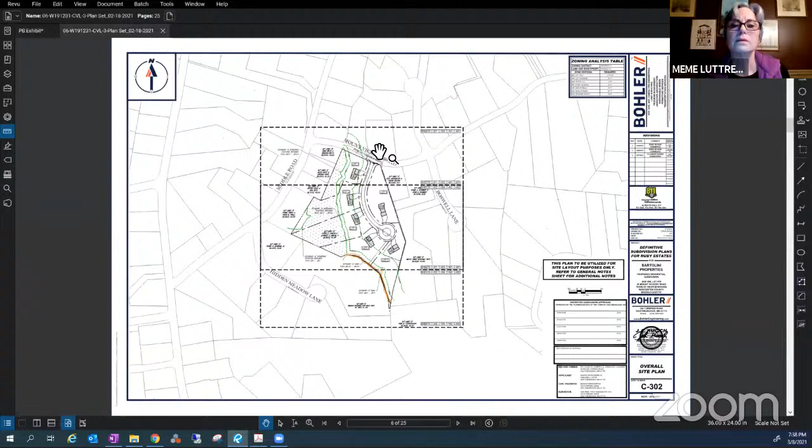I have a couple of questions. There's a 32-inch deciduous tree outside of the limit of clearing on lot 6, in the northeast corner, that's slated to be removed. Do you know why? Just trying to situate myself as to which one that is. Is that on lot 6? You said 32-inch diameter.

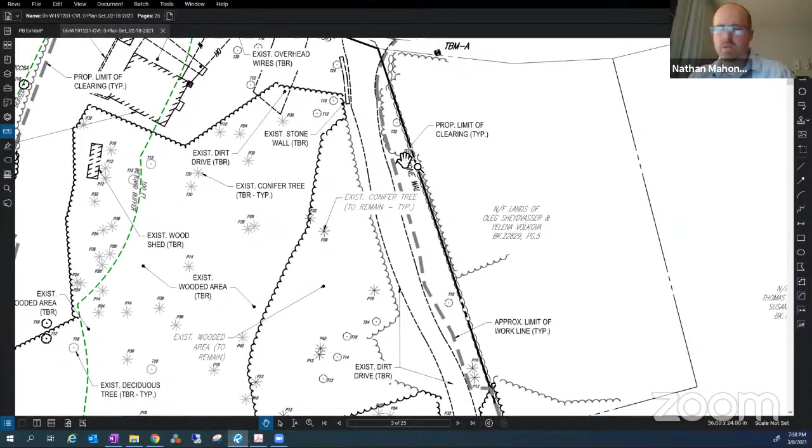Yeah, over by the stone wall. That may just be a typo on the plans. Everything adjacent to the stone wall in this area is proposed to remain, but I'll check to make sure there's nothing misdesignated along this stretch here.

So the way I read it, the darker marks were staying and the lighter ones were being removed. Is that right? No, it's actually reverse of that — my apologies that was unclear. The trees to remain are the lighter ones, and the ones to be removed are the darker color. So those along the stone wall are all light.

Yeah, I think they're just not showing up very well — I believe it's just a plot of the PDF. Everything within this stretch here, outside the limit of work, should be to remain. But I'll make sure that's clear on the plans, even if I have to label them individually as to remain.

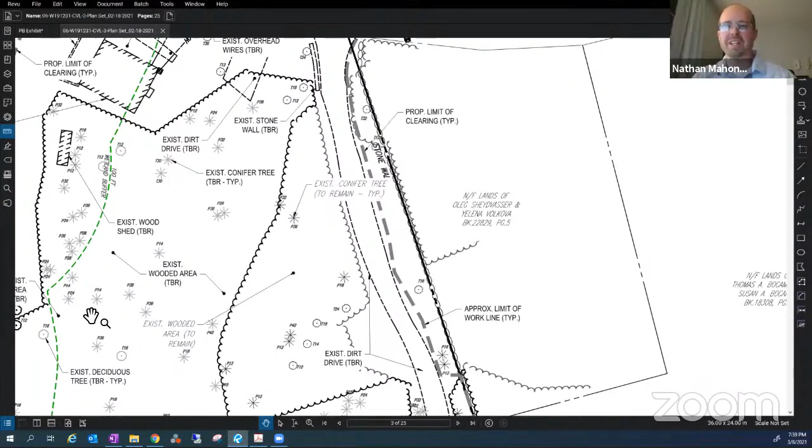And how will the trees that are slated to remain be protected during construction, within the limit of work? The initial thought is to put up an orange tree protection fence around those areas to denote that they are to be protected and to remain. Outside of that, the contractor will have to work with the developer to make sure those are designated and maintained in a healthy condition.

Okay. Nathan, did you provide us a PDF of this color plan? I did not, but I can provide one for your files. Okay, super, just email it to Sarah if you could. Absolutely, or me.

And where's the wildlife seed mix being planted? It is in this area over here, really in the back area, and then there is a portion up over here as well.

And how will those areas of the increased buffer be preserved going forward so they aren't mowed down? During construction, they're going to be marked off with erosion sediment control fencing and so forth to demarcate the limit of work for the contractor. The Conservation Commission has asked us to install markers along the 20-foot no-touch zone for the wetland to help identify the limits of those areas for the future homeowners.

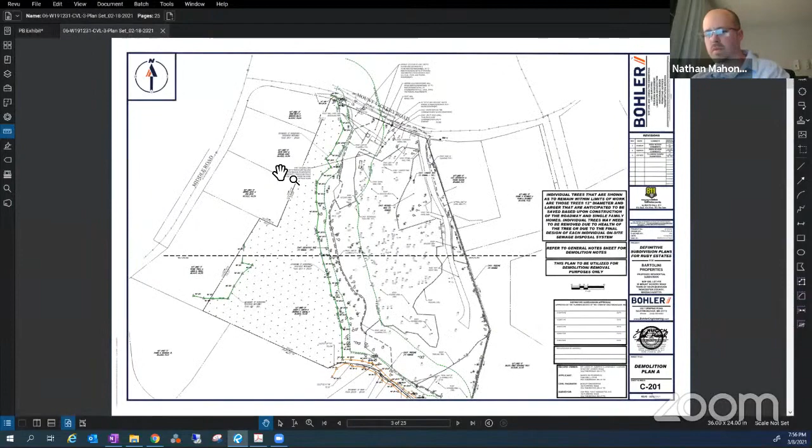Which leads me to sheet C-902 — if you can put that one up, Nathan. Or the one before it. Yeah, let's go to the one before that first.

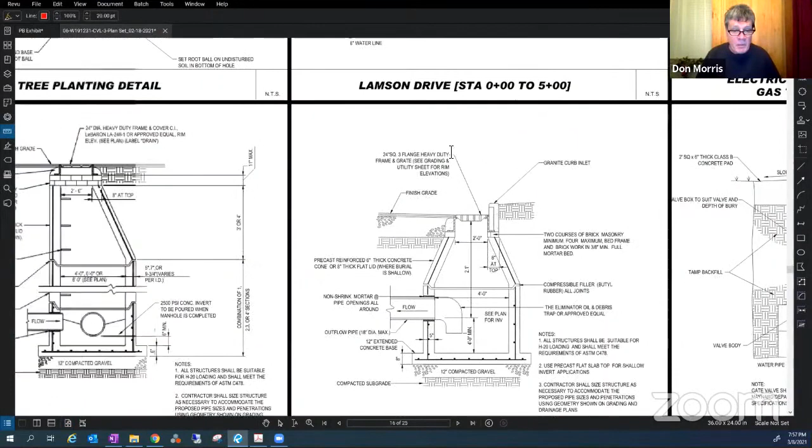And the granite curb is being proposed at the entranceway. Do we have any catch basins? Yes, we do. Any curbing at catch basins is supposed to be granite, if I'm right. Yeah, we do call for that on the catch basin there with the granite curb inlet.

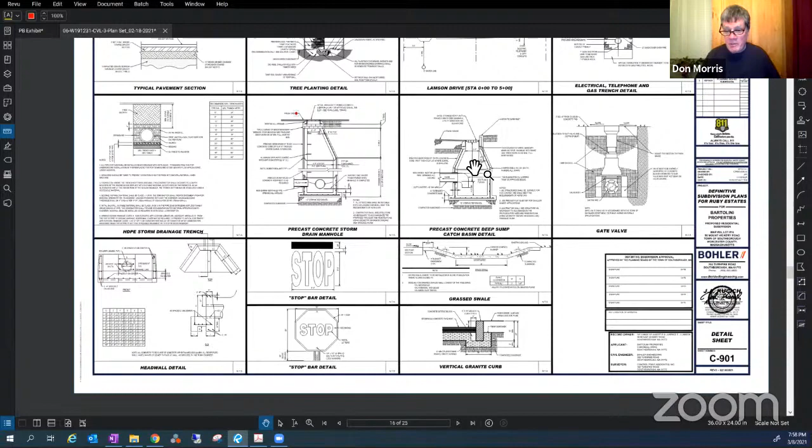So on either side of that piece of granite that backs up the inlet, it feathers down to some other type of curb, which would be the Cape Cod asphalt type berm. Is that right? Correct. So let's go to the next sheet, 902.

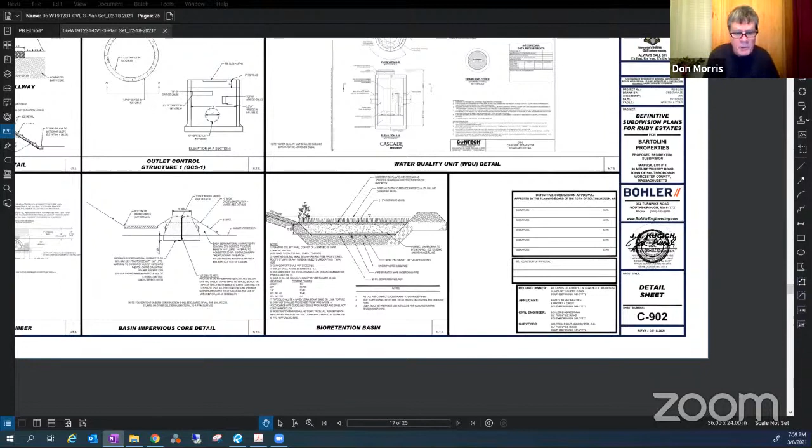Down on the bottom, we have the bioretention basin. It looks to me like that's a cut and paste showing a typical bioretention basin and how it's intended to function, which is fine. But on either side, it shows a different type of materials or conditions, and I don't think any of them apply to where we're putting the bioretention basin.

So if we go back to the first page you had tonight, the one with the colors - what I'm asking, for clarity and for the record, would be to pick a station along the road, let's say between house 1 and 2, and do a cross section of the roadway. On the west side it would show grass, then a Cape Cod berm, 20 feet of pavement, and then grass sloping down to that swale.

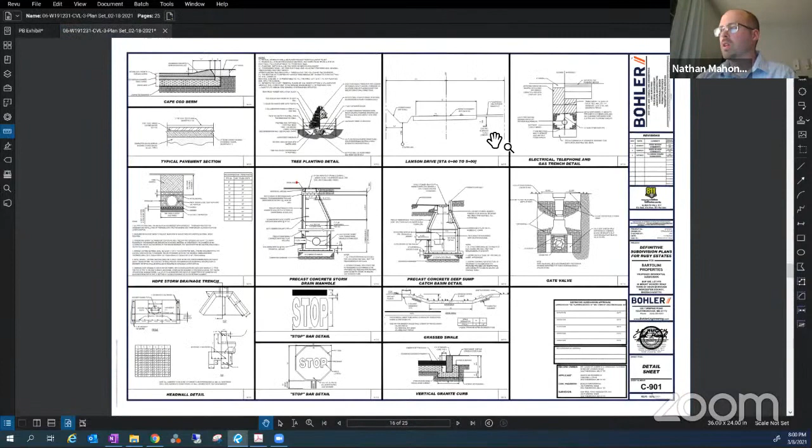Is that right, Nathan? So the plans do show a typical cross-sectional detail for stations as you come in off the entrance down to where you get to the curb, showing the cross pitch, with the road pitched to one side. So curbing isn't required on the upper end, and on the lower end where we had curbing, we're now requesting a waiver for the grass swale. If something similar would help in addition to that typical detail for the bioretention through the cul-de-sac area, we could do one there as well.

Yeah, I guess I missed that one on 901 at station 0 plus 00 to 5 plus 00. Do you know if the DPW director has seen that? Or do you have a green light from her to do this?

It's my understanding the plans as submitted are distributed to department heads for review and comment. We haven't received any comments from the DPW to my knowledge. All right, well, I think what we'll do in the time we have is chase that down and make sure we have a clear green light from DPW that this arrangement for that 500 feet of roadway is okay.

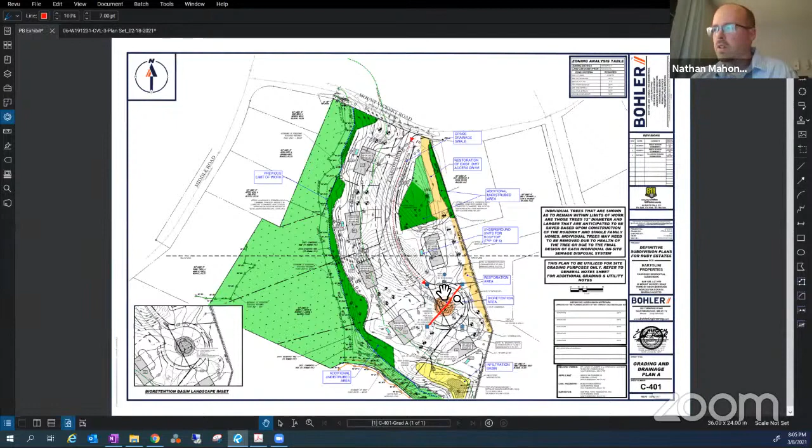I think we need to have a good detail of that, because I can just say which way the water would go, and then if there's any kind of a lip, a mound of sand, ice or snow, it's going to stay on the pavement and work its way around the bioretention area. I guess depending on the steepness of the grade, that would vary. So I'd like you to take a look at that and give us that cross section if you could.

We could certainly add that. And sooner than later, because I'd like to really have a comfort level for the planning board that the DEP, the DPW is okay with it. And if it's really a good idea, then maybe we would incorporate it. The DPW and the town would use a similar type design.

So, the waivers, no, also on this sheet, those little blue recharge structures, are those new, were those on the plan the last time? No, those are new with this submission that was recent. Oh okay, I suppose there's a detail for that.

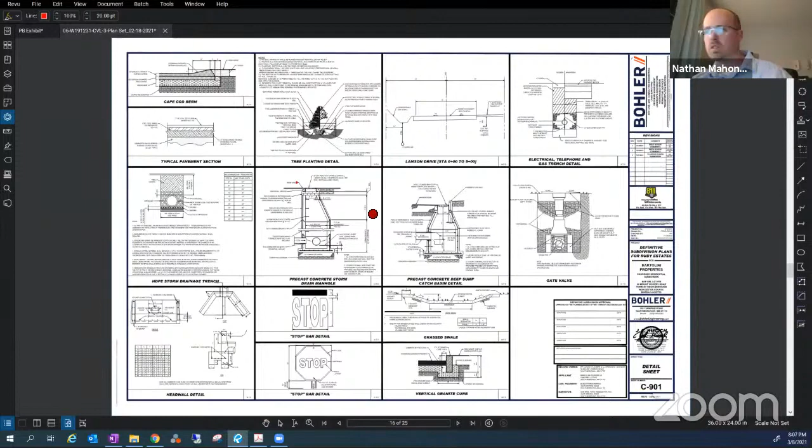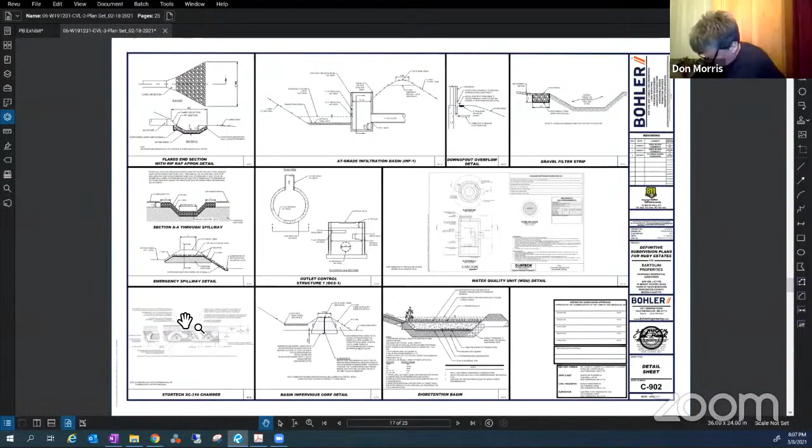There is, it's a typical detail for the StormTech SC310 chambers. Is that on 902? Yep, that's on the bottom corner of 902. Oh yeah, oh you have the Caltex in there? The StormTechs, yes, it's the plastic arch chambers. Yep, okay.

I can't read it, does it say the capacity and the size? So it has the information for the units on there. The grading and drainage plan calls out the particular number of units to be installed in each location.

And I believe, maybe I misunderstood, but did you say a few minutes ago that you've reduced the footprint of the houses? Yeah, I believe Mike chimed in and said that the footprints were smaller with the new footprints we have on here. Do you know what the percentage reduction is? That number, I don't have it off the top of my head, no. It's less than 50%. Yeah, it's not a 50% reduction in the footprint size, no. Would we say 20%, 10%? I'd have to overlay them to get you a closer number.

Well, it must be not a tiny number, like 1 or 2 square feet, because some of the more eagle-eyed planning board members observed an apparent difference. So I think that's the kind of thing, in addition to the other things that you did, that we were looking for at our last meeting as far as taking the LID seriously. And it seems like you've made major steps in that direction. So much so, I guess, that the conservation has given you the green light. And you're not hearing a whole lot of critical comments from the board tonight.

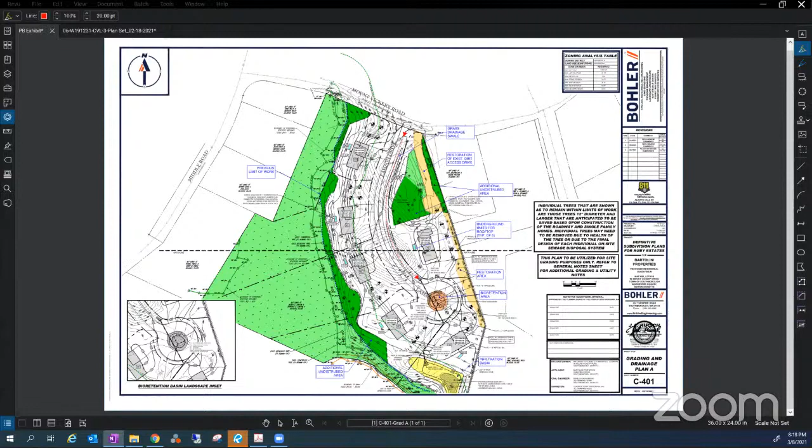Okay, thanks. Anyone else from the public? I do not see any other hands raised. Okay, while we're going over this next piece, if someone does tune in from the public, you'll let us know, Sarah.

So the current approval period for the definitive subdivision is March 20th, and for the LID is April 12th. Now, the proponent has submitted a request for continuation and extension of a public hearing, to continue the public hearing to March 29th, and that the approval period on the matters, which I take to mean the LID and the definitive subdivision, shall be extended to April 16th.

So before we can continue the public hearing, we need to extend the approval period. And that motion would be to extend the approval period for both the LID and the definitive subdivision to April 16th, 2021.

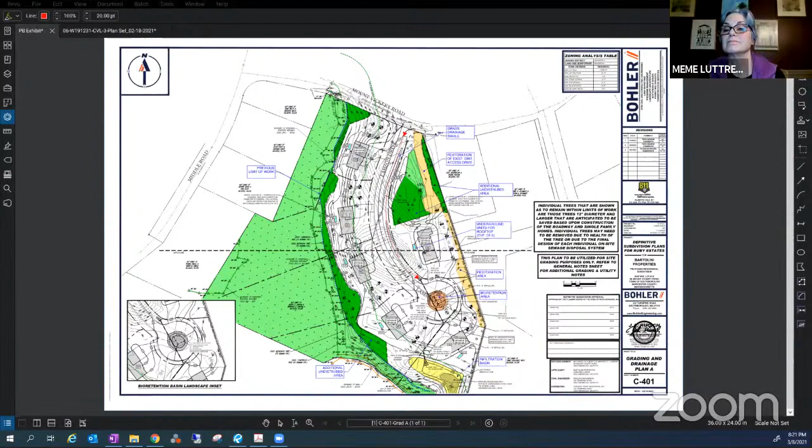Meme, you cut out. Could you do it one more time? Luttrell, yes. Thank you. So, Michael, I will, and Nathaniel, I will...

Sign this and get it to the, this is your request. I will sign this and get this to the town planner. You gonna be in tomorrow, Karina? Yes, I'll be there. We'll try to get it to the town planner and then the town clerk tomorrow.

And thank you for requesting that extension. So we all have a little bit of homework to do. Not much compared to what we talked about the last time. So seems like we're really making very good progress. Any more questions or comments before we entertain a motion to continue the hearing?

Oh, we already did. I have a couple quick questions. One question for you, Mr. Chairman. Isn't it precedent of the board to ask for sidewalks someplace else when a waiver is requested? We've done that. And again, maybe that would be part of our research to see, if it's a 2-house subdivision, I'm not sure how often we would ask a developer to put in 100 feet of sidewalk someplace else. But if it's a 20, 30 house subdivision and it's waived and there's a need for it somewhere else, we have negotiated that. So I guess we'll take a look and see what we have for a need for sidewalk and the developer's ability to grant any request we may have to build a sidewalk somewhere else.

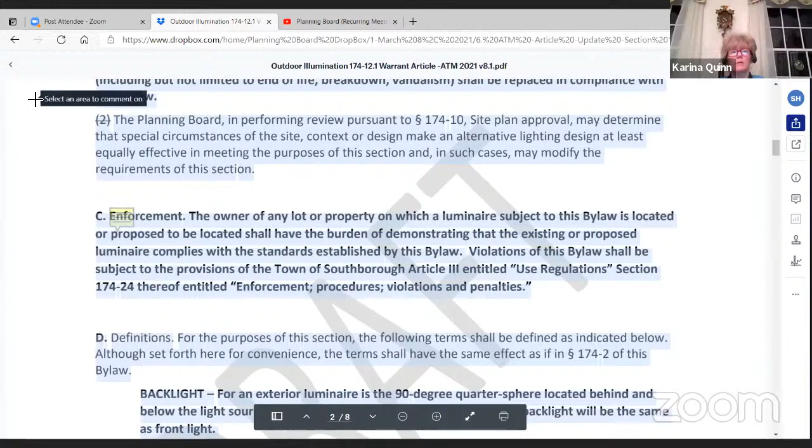I don't know why everything's highlighted. The enforcement piece, I'm sorry, I don't know why everything is highlighted here. Try clicking somewhere on the screen. Nothing, huh? No. Just one second, I'm just gonna... Gotta love technology, right? I'm just gonna try to close it and open it back up again. All right, better. Okay.

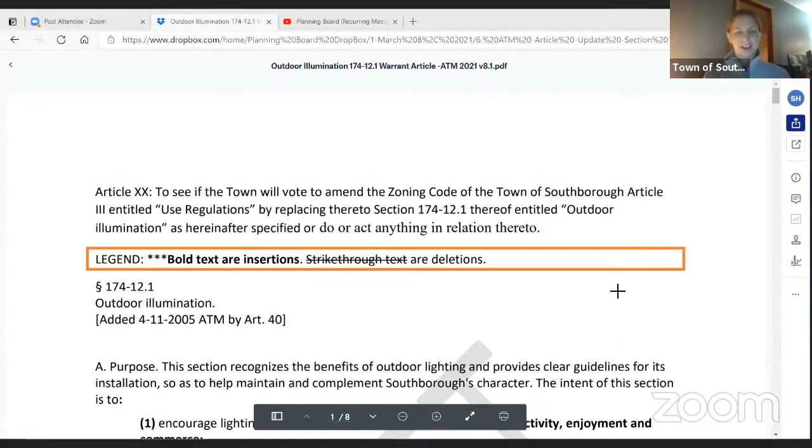So really, the enforcement section is where I think the working group is going to be likely focused in terms of revisions this time around, to make sure that interdepartmentally everyone has an understanding of what the process is. There were some details written into the original bylaw revision, many moons ago,

that really specifically laid out the process for enforcement. Town Counsel and the Board of Selectmen both weighed in and recommended dialing that back to a reference to the enforcement section currently in the town code, and then to move any kind of administrative processes over into the rules and regulations. So at this point, that's kind of what we're working on: the enforcement section would go into the bylaw, and the administrative details would be worked out in the rules and regulations over the next few weeks.

Marnie, I don't know if you have anything to add. Yeah, I think at a high level there is a discrepancy in interpretation of enforcement. We needed to be very crystal clear that the illumination bylaw is for the town of Southborough, articulating upfront that it's not just for industrial or commercial properties—it actually applies to residential as all of our town code does, but apparently we had to be very clear about that in this bylaw update. By doing that, we also wanted to provide clarity for enforcement: that the owner of a property that is subject of a complaint would be the person responsible for actually proving that their luminaire doesn't trespass and impose any challenges to the bylaw.

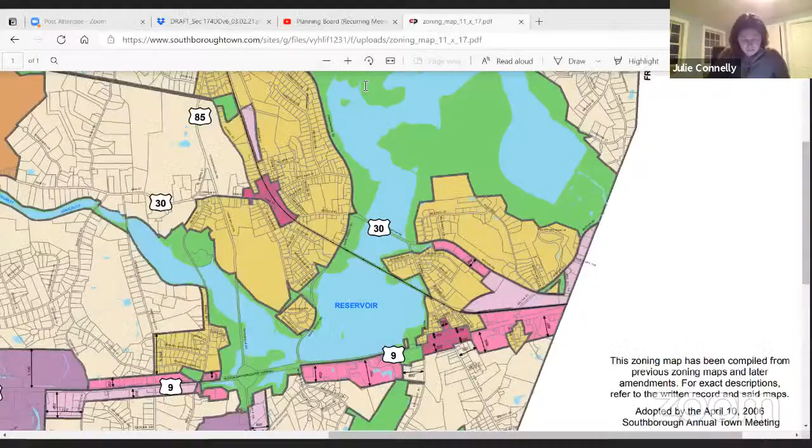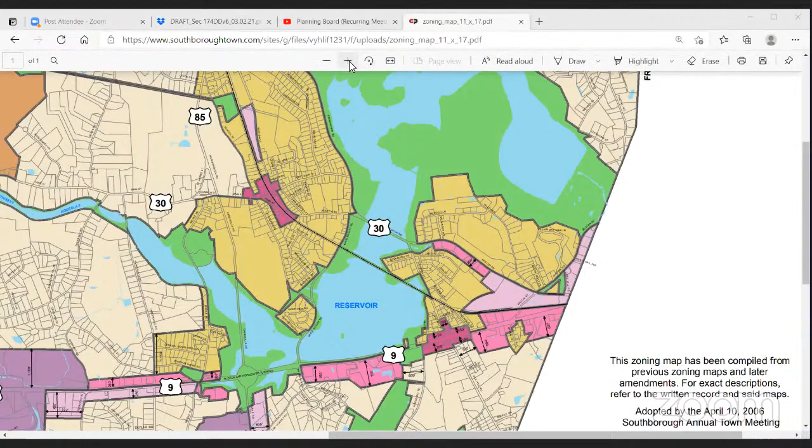Yes, thank you. I'm very appreciative of some of the comments of planning board members, particularly Mr. Mills, who makes my case quite eloquently. I'm not sure I really need to add much, except that I think the EDC has their agenda, and that's to lay out the uses they'd like to see made in the downtown. But it's up to the planning board, finally, to plan and to set the terms of the zoning.

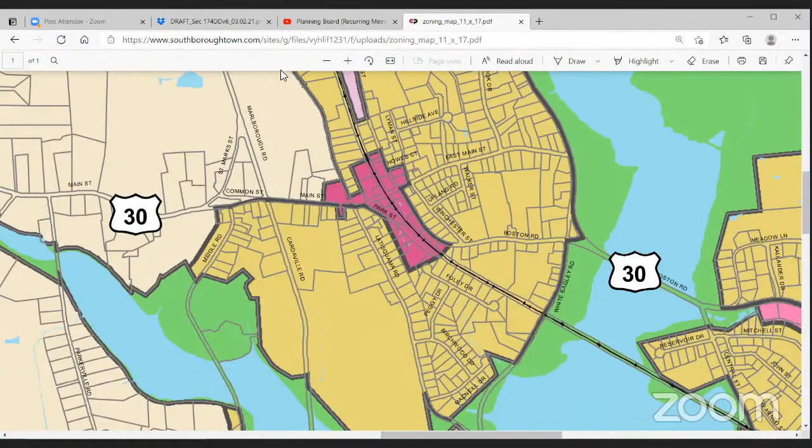As is pointed out, in the EDC committee meeting on February 25th, the committee made their intentions and their beliefs quite clear. I'm hoping that somebody from the planning board was present on that call or has reviewed the recording of it. And I hope citizens on this call will, if they did not see the Economic Development Committee February 25th meeting, look it up on YouTube and watch very closely, because it's all made quite plain.

Mr. Anderson, Robert Anderson, a member of the committee, said, quote, theoretically, this is concerning folks who have fragments of their property included in the district, that theoretically they could do a lot split and sell that commercially zoned property to the abutter and kind of make some money off the sale of the back of their property and keep the residential on the front side. That's as plain as it could be.

And when pressed about the point on the district, Mr. Anderson went on to say that to rewrite the map was one of the options that was offered to them at the outset. And Ms. Connelly indicated that Judy Barrett pushed us, quote, in the direction of just renaming the district rather than redrawing the map when the opportunity was there right at the beginning.

But why was that not done? Because it was the easiest way out, and they could concentrate on their uses question and the by-right issue and not deal with the map, because that was felt to be opening up a can of worms. That was the commentary on that call, that everybody was worried about, literally, quote, opening a can of worms.

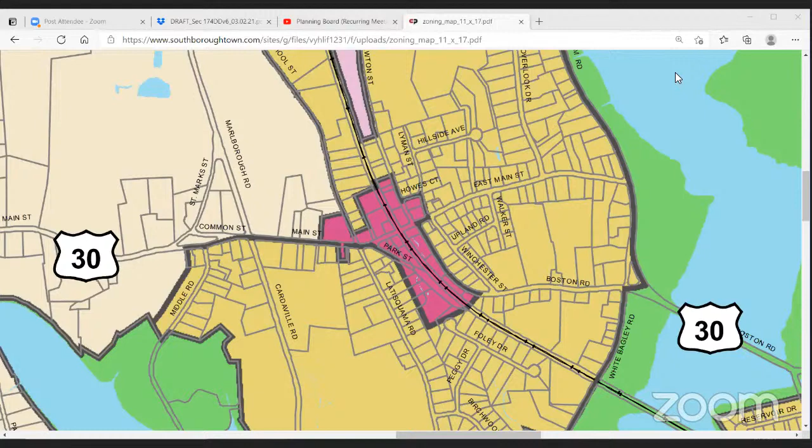So the only comment that I have is just expressing hope and optimism that this issue can be resolved to everyone's satisfaction, so that this proposal that I know Julie and the Board of Selectmen and the EDC and everyone has put a lot of time and energy into can ultimately come to fruition. That's my only comment, is just to encourage consensus and positive movement on this. I mean, I have some ideas, as I'm just thinking, sitting here, about how this could be resolved, but they deserve kind of careful thought.

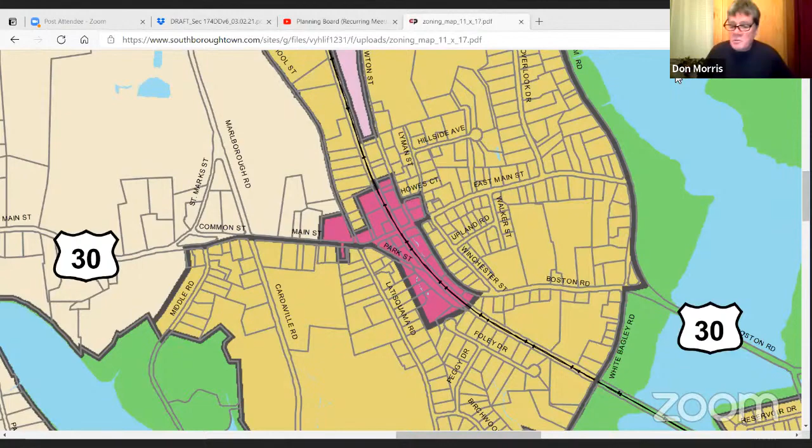Anyone else? Questions or comments? Don, can I just respond to some of Mr. Miller's concerns? You can try. He seems to be. Sure, go ahead. Sure, I just want to clarify one.

I don't believe that it's possible under the proposed bylaw for a 4-acre parcel with contiguous slices of these split-level lots to patch that together and put something in there. The only thing we're changing, as far as what doesn't need a special permit from the planning board, are certain specific uses, with the point being to encourage those uses.

This is not, as everybody on this call knows, changing the zoning bylaw downtown is not new. This is something that's been looked at again and again over the years. This was recommended for 13 years, or at least now. It was recommended in the 2008 master plan. It's been recommended in the housing recommendations.

This is the first time, at least, that I've heard somebody asking to change the map. I don't think it's wrong to change the map, but I don't think the proposal on the table right now increases the risk for those property owners any more than maybe what would already exist. And I think that's slim to none.

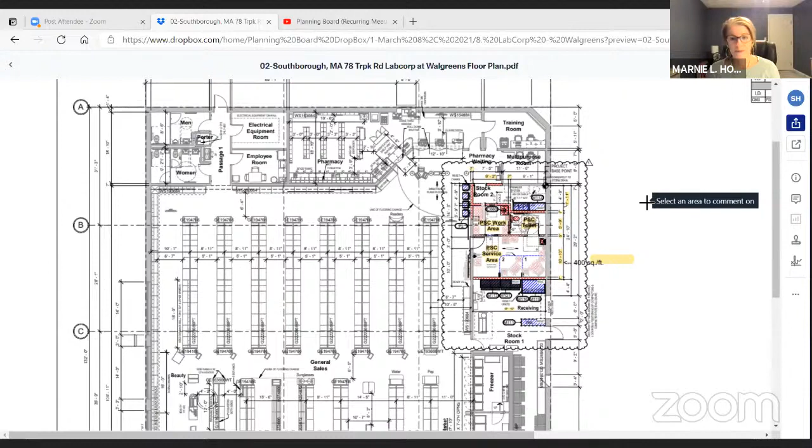My issues are addressed, I have no more worries. Thanks for hanging in there, Tim, it's been a long night.

I'd like to follow up on my experience with building clinics and hospitals and dealing with changing uses, needs, and equipment technologies. So Tim, you said that the vast majority of the blood taken from each person is containerized and removed from the site? Right, right, it's usually sent out for testing, but anything else is put in the appropriate container, so there's no risk to the outside. Anything sharp is put in a hard rigid container for transport, and anything soft is put in red biohazard bags and then boxed up and sent out that way.

Well, I'm certainly no medical person, but I've been in labs within clinics and hospitals where they analyze the blood and then pour it, or other body fluids, down the drain. Is that going to happen within this building, or is the down-the-drain stuff done somewhere else? Maybe urine, but not the specimens, not the blood.

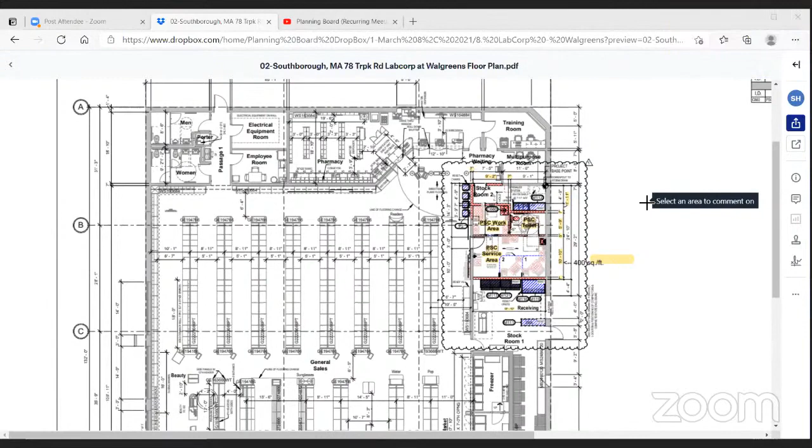Okay, I can do that. I'll follow up and I'll get back. Who should I get back to, Sarah? Well, Karina will decide who you get back to.

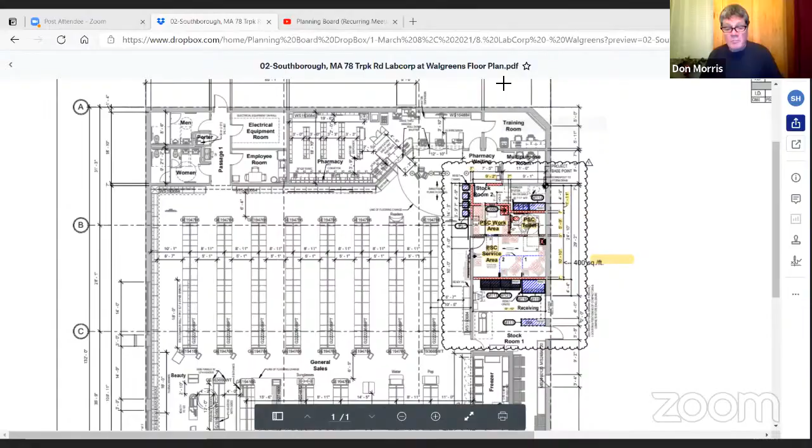I just want to ask the board, are we all set with saying that there's no further action with the planning board, especially relative to site plan or revision to the special permit? Yeah, I'm comfortable with that. I'm not 100% sure of that, but I'm not going to stand in the way either, so I guess I'm abstaining. Mimi? I think I'm okay, thank you. Marnie? I'm okay with it.

So Tim, that means you have to give Mrs. Houlihan a free ticket to your next LabCorp because she gave you a commercial. If she really wants to get her blood drawn. That's an ethics violation, Mr. Morris.

So Karina, you have some form of written correspondence between us and Tim? Yes, emails. So would it be appropriate for you, in whatever email string you may have, to confirm tonight's meeting and send an email to him confirming that the planning board determined that they're not required to do any more applications or approvals from the board for this proposed use? That's what you would need, right, Tim? Something in writing? Correct.